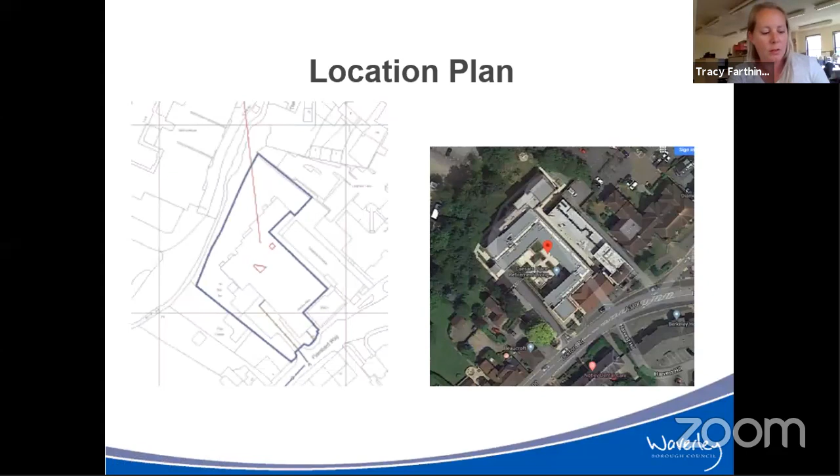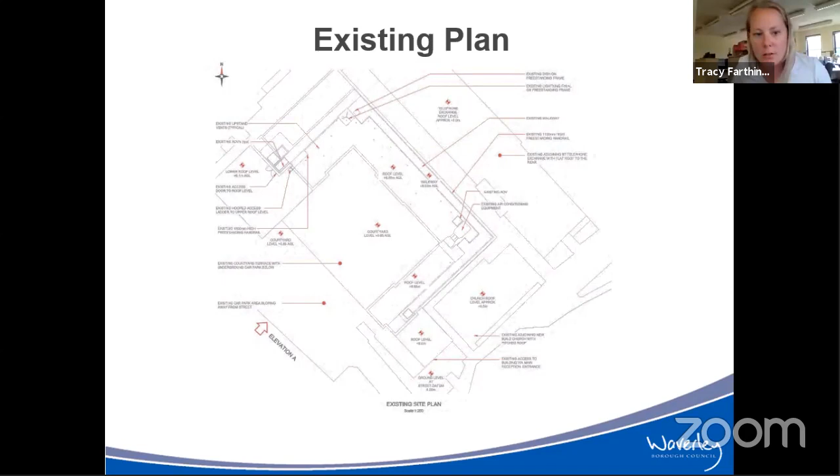Caesars Place is a development of retirement apartments on the northern side of Oxford Road in Godalming. There is at present a small amount of rooftop equipment on the northeastern part of the roof. The proposal would see a 5.5 metre telecommunications pole at that most northeasterly point, with proposed 4 dishes mounted on a frame, and to the southeast of that, 4 equipment cabinets.

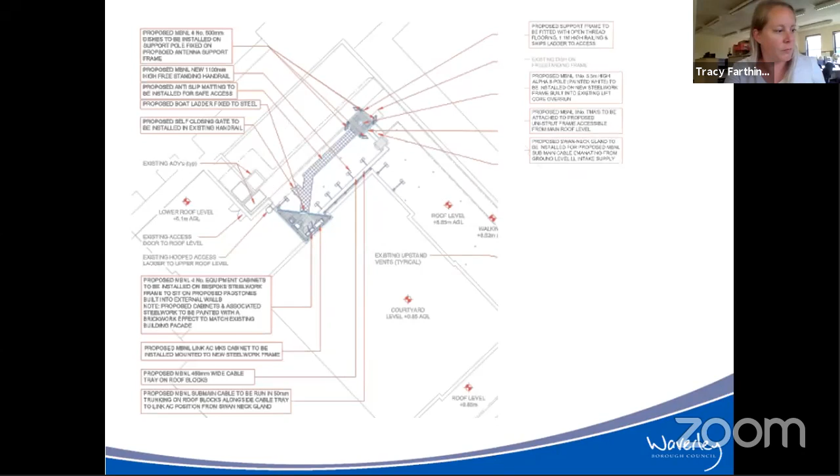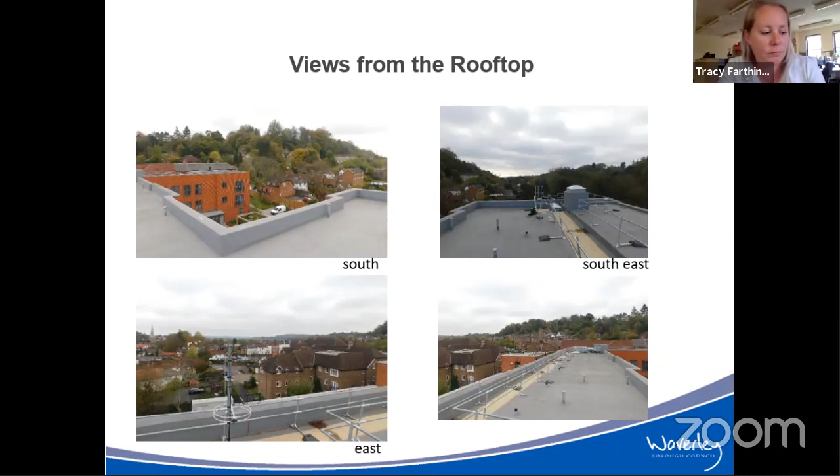The key matters for consideration are the impact on the conservation area and the visual amenity. Thank you, Chairman. Thank you.

Councillor Higgin, you have your hand up. Is it something relevant to this point, or can we leave it until the discussion? I'd just been going to ask about the delegated authority decisions, but you had already dealt with that.

Okay, thank you. So we have one speaker tonight, Mr. Arthur Hayes, who is going to object to the application. Mr. Hayes, you have 4 minutes to make your points, please go ahead.

Can you hear me? Yep, we can hear you. Right.

First, thanks to all for visiting Caesars Place last week. We hope the visit was informative and will be helpful when considering the Waldon Telecom planning application.

In my letter listing objections of 31st of December last year, I noted that an important elevation was missing from the application documents. This elevation should have shown the proposed position of cabinets located above apartment 31 in relation to the pole and the aerial.

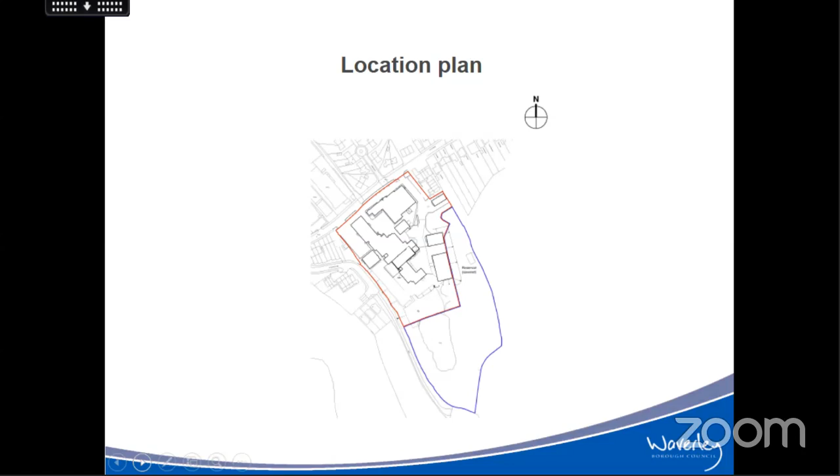You can see an area of blue indicated on the plan as well, which is land also within the applicant's ownership, but outside of the current proposal. The buildings indicated on the site plan have all but one been demolished. And just a note on land levels, they change significantly through the site, with the southern part adjacent to the wooded area and the lake being at a much higher level than Cattershall Lane itself.

And here you can see a copy of the block plan, starting at the top right hand side of the site. The white building is the existing ambulance station, which is to be retained. Behind that there's a block of residential accommodation, and also the proposed commercial building, which would have a non-residential institution use, currently proposed to be a nursery at ground floor level with office accommodation above. The development contains a mix of flatted buildings, the larger buildings you can see there, and dwelling houses throughout the site.

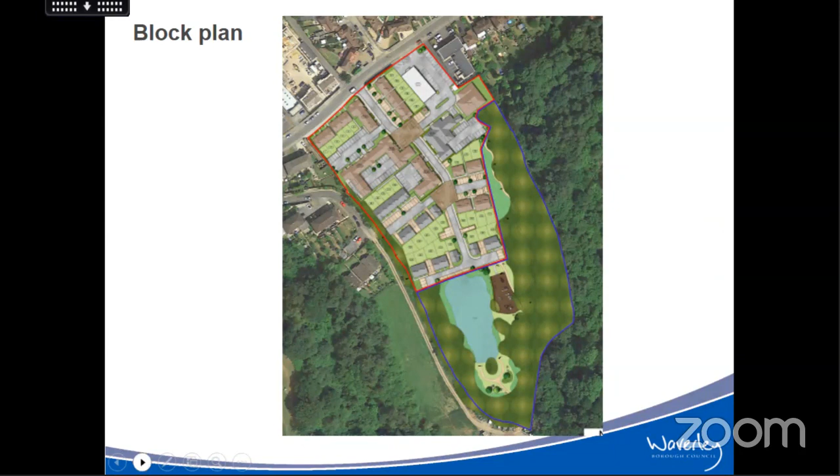So in terms of the details of the scheme, it's a reserved matters application, so the principle of development isn't for consideration at this point. It's the reserved matters of layout, scale, landscaping and appearance, i.e. all four reserved matters.

The current proposal is for 97 dwellings, having been reduced from the 100 dwellings previously proposed. 17 of those would be affordable, with 28 1-bed, 39 2-bed, 27 3-bed and 3 4-bed units within the scheme. As mentioned with the site plan, there'd also be a commercial building providing a community use, a nursery at ground floor level and offices above.

Whilst there wouldn't be a provision of play space to serve the development on the site itself, there would be provision of a locally equipped area of play, or LEAP, to the south of the site within the blue line land, in the wooded area adjacent to the existing lake, and that was something we've granted consent for following a recent committee determination.

The scheme would also provide 208 parking spaces to serve the 97 dwellings proposed alongside the commercial accommodation and the existing ambulance station.

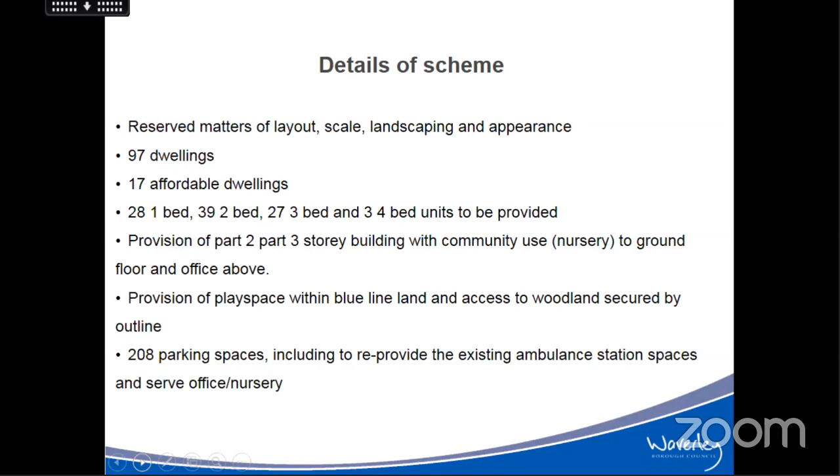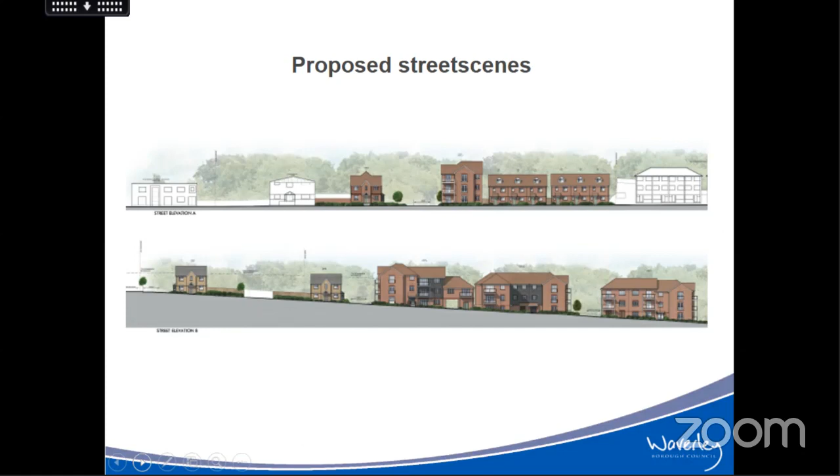You can also see the block of flats proposed onto the corner of the Spine Road, and further blocks of flats as you move up through the site, with the upper part of the site occupied by family dwelling houses.

Here are the detailed elevation plans for the proposed units onto Catteshall Lane. There would be 2 blocks of 3 terraced houses, which would have a 2.5-storey form with dormers to the front windows and a traditional floor plan with the master bedroom within the roof space.

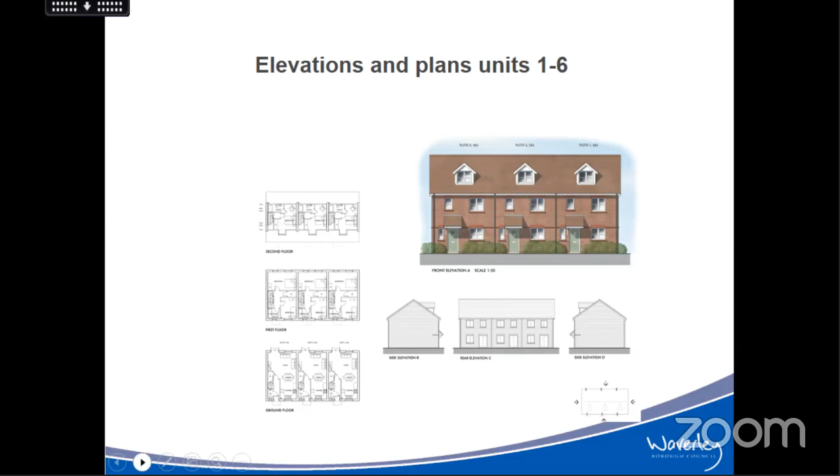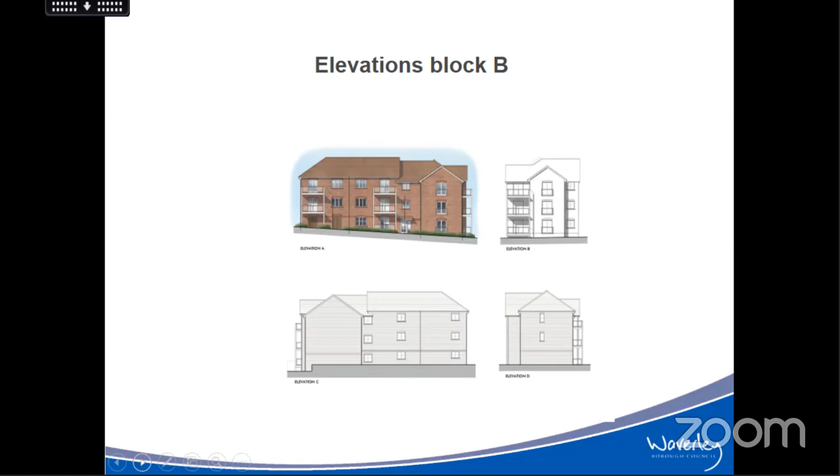Here you can see elevations for Block B, the block of flats immediately adjacent to those terrace buildings, part of which would be fronting onto Catteshall Lane. The right-hand image at the top is the front elevation as it would be presented to Catteshall Lane, with the coloured elevation being as it would appear from the road within the new development.

And finally, here's an indicative elevation for some of the semi-detached dwelling houses which would be created facing towards the lake at the top, or southern end, of the site.

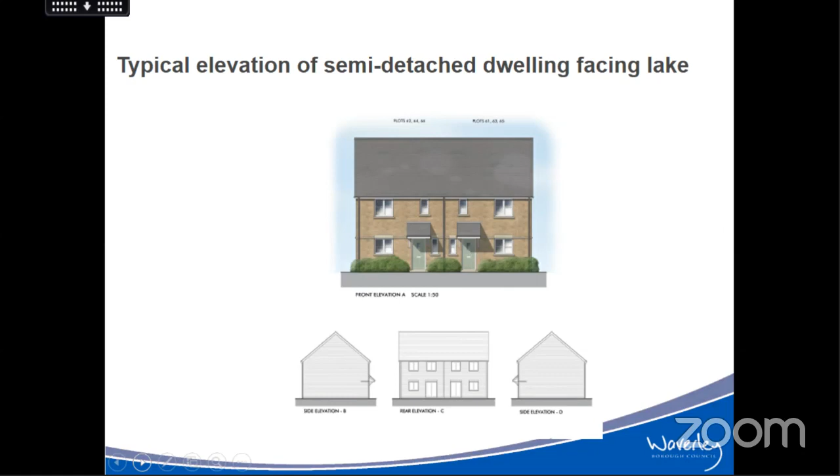Here you can see a parking plan. The spaces shown in pink are allocated parking spaces, and the spaces shown in green are unallocated parking spaces, so there would be a mix of parking spaces throughout the development. Those in brown at the top corner of the site would serve the commercial units, and those with a line drawn through would be a reprovision of the existing ambulance station spaces like for like.

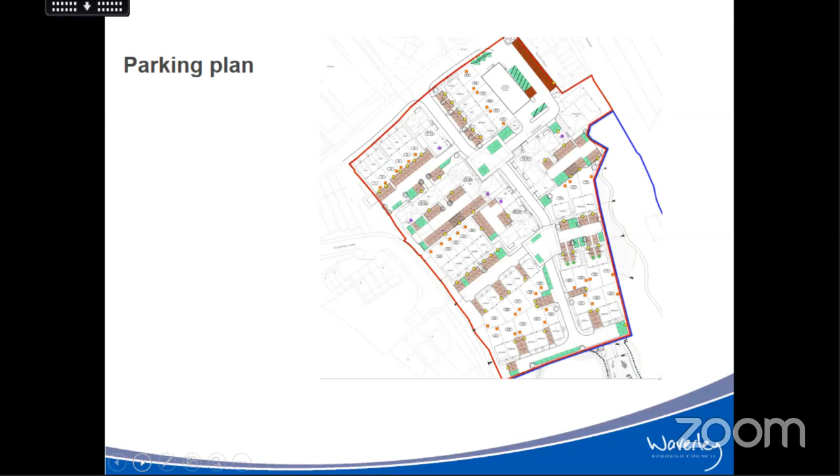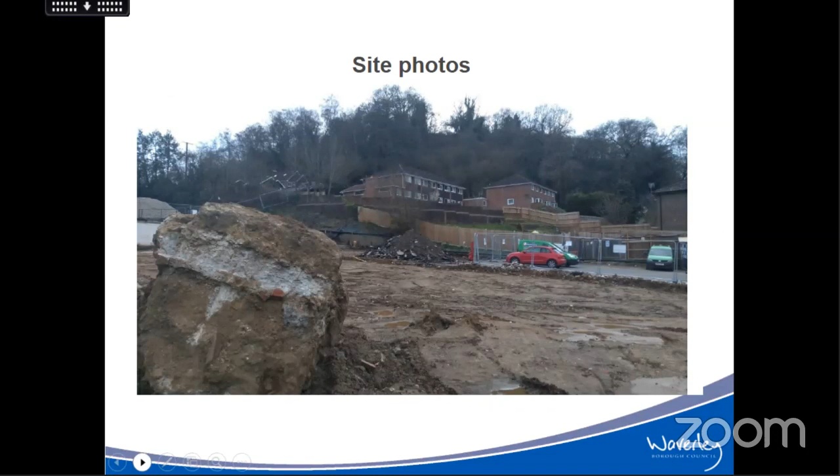Now looking in the opposite direction towards the wooded area from within the site, you can see again that to the other side of the site there's also a significant rise up.

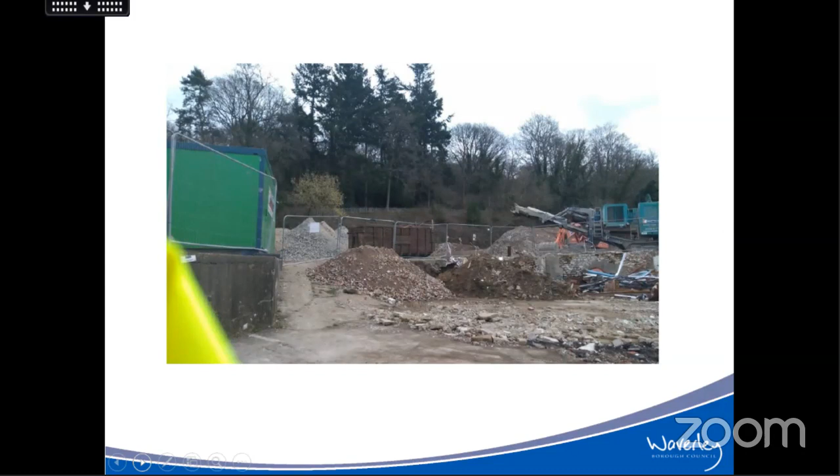Looking now towards the top of the site, you can see the way the top of the site is surrounded by woodland, and again the change in land levels.

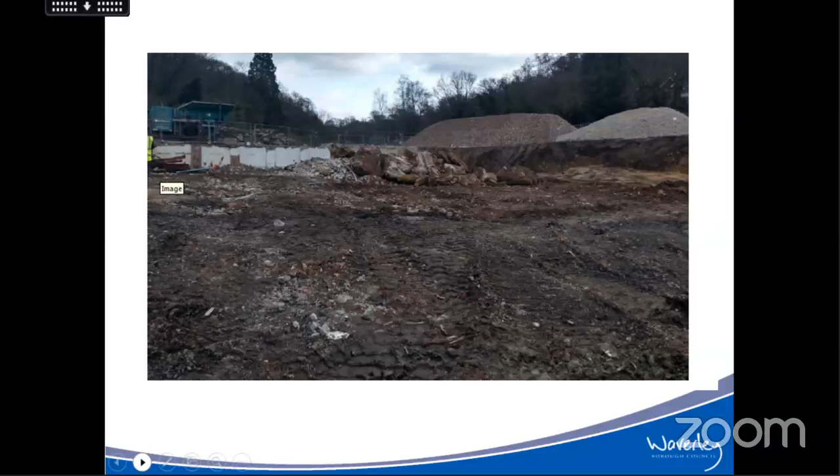Looking now from the top of the development site down across it, you can just see in the background the blue building, which is the retained ambulance station, and on the opposite side of Cattershall Lane, the relatively newly constructed dwellings, which have 2.5 storeys.

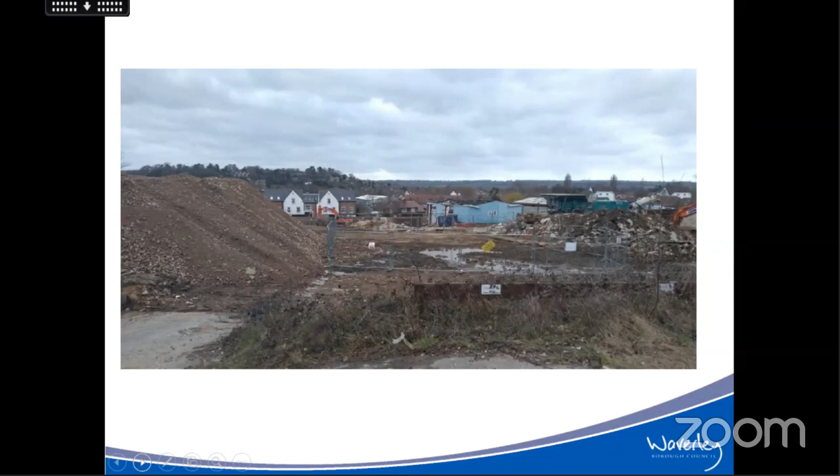As members will be aware, there was an application refused at the end of 2019 for reserved matters on the site, which I think is highly pertinent to this decision. So I've provided some information here to compare the two schemes.

The first refusal reason for that scheme was in relation to it having a detrimental impact on visual amenity due to the scale, mass and bulk of the buildings. As articulated at the meeting, I think the primary concern was in relation to the elevation onto Cattershall Lane and this appearing out of context within the surrounding buildings.

In order to address that, you can see here that the applicant has amended the scheme to break up the large block previously proposed fronting onto Catteshall Lane. Instead of providing flats throughout that whole area, they have proposed 2 terraces of 3 dwellings of 2.5 storeys, shown in the bottom image, which is now what's proposed.

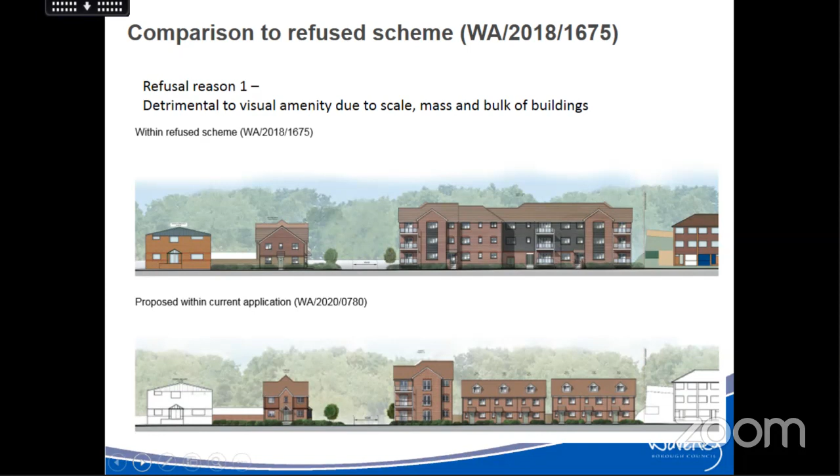As you can see, the ridge height of those dwellings fronting onto the lane has been reduced below that of the existing neighbouring properties to the right there on Skiston's Climb.

The second refusal reason was in relation to it being detrimental to adjoining occupiers, and that was predominantly articulated in relation to concern about overlooking.

The concerns about overlooking were twofold. One was in relation to a concern about overlooking of the properties to the opposite side of Cattershall Lane, the newly constructed properties.

The amended scheme now, with the much smaller terrace dwellings proposed in place of the previous block of flats, has had the previously proposed balconies removed. There are 2 balconies now proposed within the current scheme fronting onto Catteshall Lane, but they wouldn't be directly facing towards the newly constructed dwellings opposite. They'd only be facing towards an existing access to offices on the opposite side of the road.

The other element of the privacy concern was in relation to overlooking, predominantly of the garden of 1 Skiston's Climb. That is the building which immediately adjoins the site, which you can see on the left-hand side of the image here, outside of the red line.

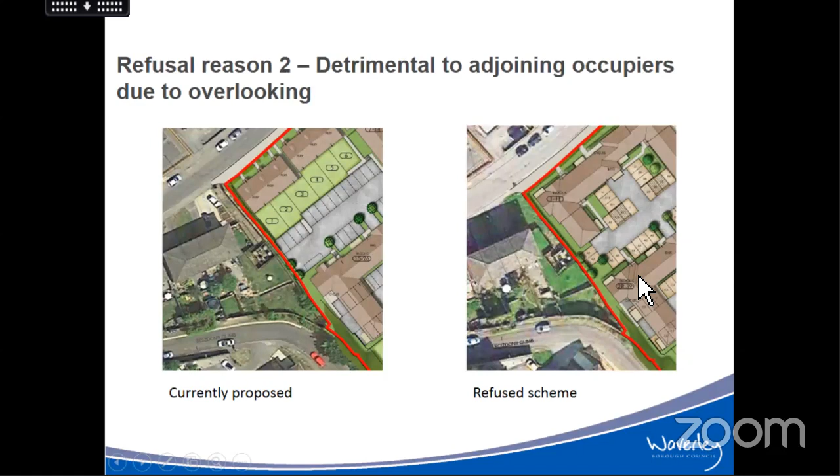If we look first at the right-hand side image, which was the scheme previously refused, and that western elevation onto Block C, you can see there were previously a number of balconies and principal windows to habitable rooms proposed onto that elevation, and there was a concern that they would be in too close proximity to the garden of 1 Skiston's Climb.

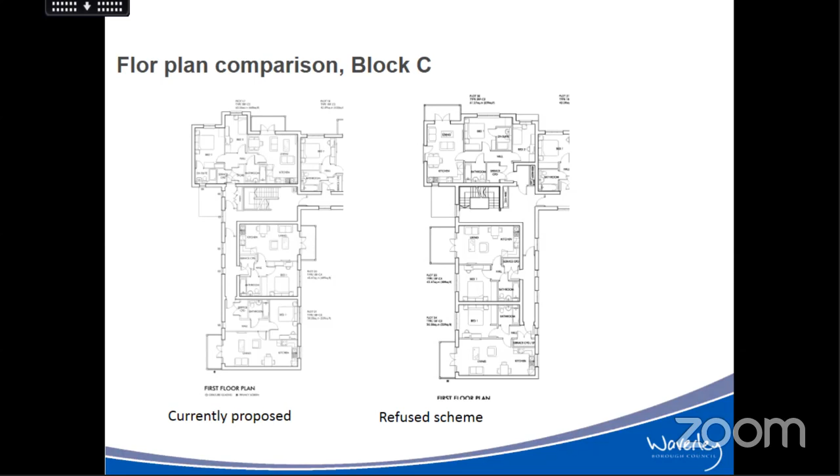That's now been amended to the floor plan you can see on the left-hand side there. In effect, the floor layout has been switched, so the windows to the corridor now occupy most of the length of that elevation and are marked as obscure glazed. One balcony would remain at the very southern end of that block, as you can see on the floor plan, but that would be well beyond the garden level of 1 Skiston's Climb and at distance from the other properties on Skiston's Climb.

There was a third and final refusal reason for the previous application, which was in relation to the lack of a legal agreement to secure the provision of the LEAP. The relevant legal agreement has now been completed in association with the revised outline application, which we recently determined, so that issue is now addressed as well.

To clarify, the recommendation is to grant permission subject to conditions and informatives. Following discussions between myself, the development manager and our legal advisor earlier today, we consider that the recommendation should also be subject to the prior completion of a legal agreement, a deed of variation, to secure the changes to the affordable housing proposed within this reserved matters application. So that is a verbal update to update the recommendation to also require the prior completion of a legal agreement.

I've provided 2 update sheets in relation to the application. The first contained viability information regarding the proposal and the affordable housing, including the applicant's assessment of viability and the assessment provided to us by the independent reviewer we asked to look over the scheme. Both conclude, including the expert opinion we instructed, that the scheme is providing the maximum viable level of affordable accommodation that it can.